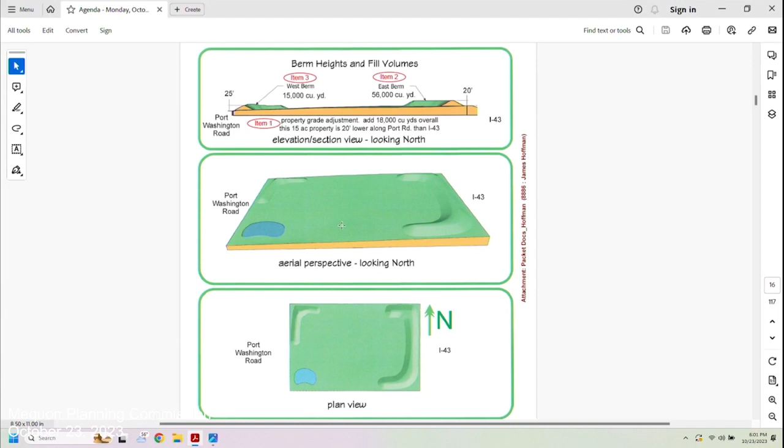I think staff is going to give us a quick overview about what this item is all about, if Cole's microphone will work. Not having good luck with that one. Okay, so Hoffman...

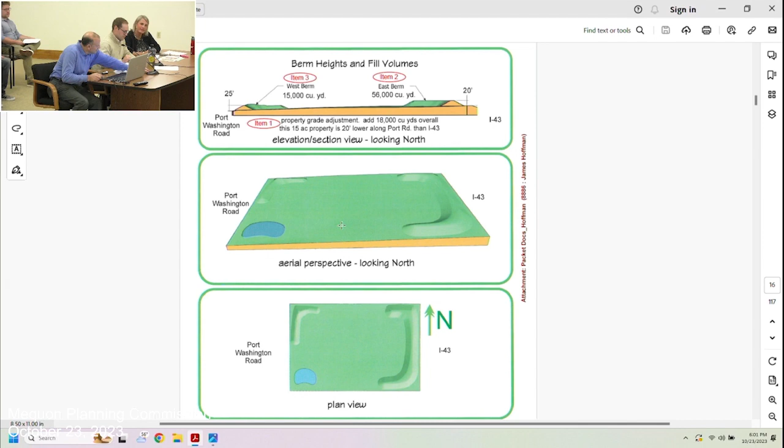Just for some context, I kind of broke this up into 3 items because there's kind of 3 different pieces to their application here. I have it up on the screen, although it's kind of hard to see. It's also part of page 16 of the packet. So the first item is 18,000 cubic yards of fill over basically the entirety of the site. I think the goal for the applicant was just to bring the site up a bit, so that'll be about a foot or 2 throughout the entire parcel.

Item 2 is the east berm. There's a 20-foot berm proposed on the right side of the screen, along the I-43 corridor. And then item 3, on the left side of the screen, is a 25-foot berm proposed along the Port Washington Road corridor.

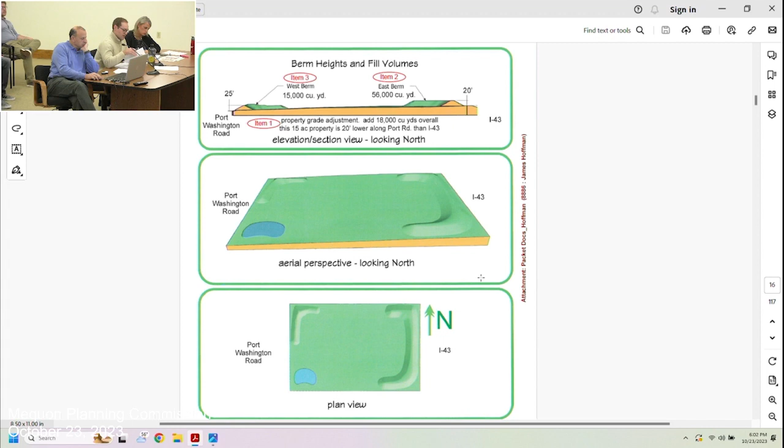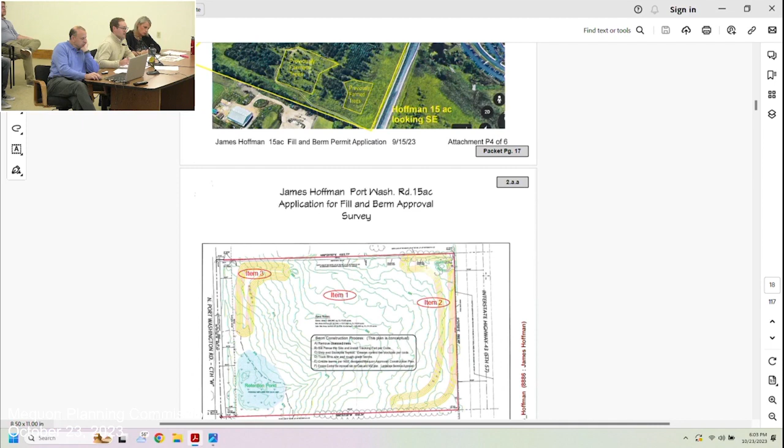Just for some context, the applicant submitted a reference to a state statute explaining that, in their view, local zoning ordinances aren't applicable to the fill and its placement for a state transportation project. We had to ask our city attorney about that. We unfortunately weren't able to provide a letter for you tonight like we wanted, but we are proceeding as if that state statute doesn't apply, and that is in the packet as well if you'd like to look at that.

So for item 1, raising the property grade of the site, that's just spreading fill throughout the entirety of the parcel. The only staff conditions we're proposing are the submittal of a grading plan for our review, so we can check adjacent drainage patterns and make sure we're not causing drainage issues. That's pretty typical with our fill permits. We also wanted to confirm the applicant was obtaining an NOI from the state, which is required for any disturbance over an acre.

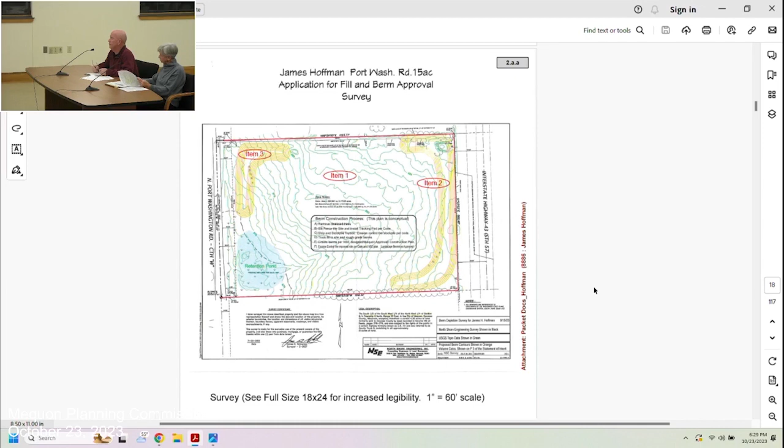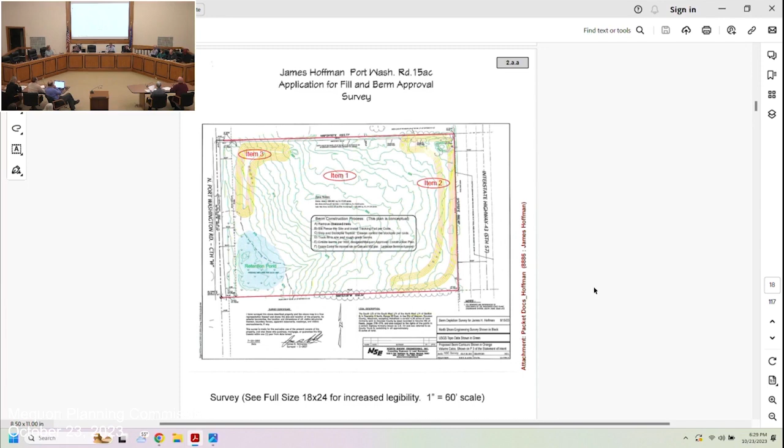So who made this slide? I'm getting confused now, 'cause did we not - we didn't make this, did we? I made that. Okay, and we wrote something on it? Yeah, the item numbers are just written on top of what the applicant submitted for this.

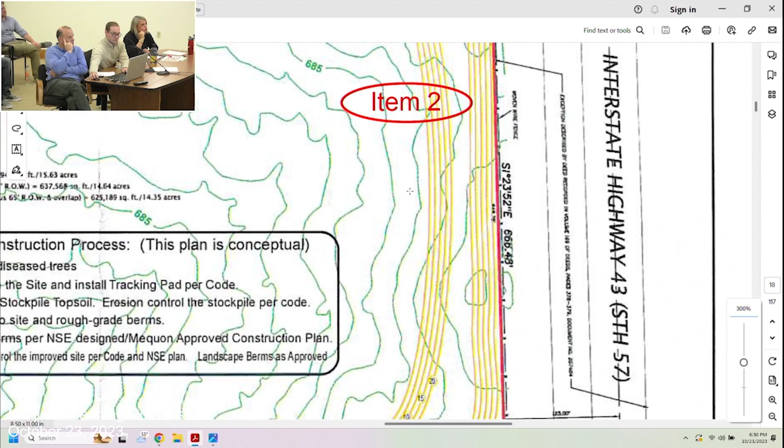Where other than our standard specs are we saying, dictating what the slope has to be? Just in the standard specs. Okay, yep. So I think - speaking for myself now just as an individual on the commission - for the berm against I-43, I don't much care because it's serving a useful function. It's certainly not the public-facing one in front. I think we're only talking about that one now. I don't think there was anything in items 2 or 3 that expressly described the slope other than our standard specs. Correct. Yep.

So if it was approved, per staff recommendations, they would be subject to that same slope as part of their final berm design. But I mean, we've approved - I think this body's approved steeper slopes on berms. We've approved them where there's unique mitigating circumstances, like a large freeway next to the property. Right, yeah. I don't think we intend to enforce the 4-to-1 there. I don't think that's implied. I think if it were stated as a 3-to-1, that would - I mean, I don't know if you need to get that specific. I don't think we do. It just has to be.

Well, we have to push your button too if you want to talk. No one can hear you except us. I like hearing you. Sorry.

A 3-to-1 slope, I'm not advocating as much as just for facts - it's something that is commonly used where steeper slopes are needed. 4-to-1 is your standard, just like you're saying. Steeper than 3-to-1 can be done, but then you're getting into more complex engineering that I think is outside of what you're doing. So I guess I'm just saying if it were 3-to-1 just for containing the berms instead, it might fit what people are talking about here.

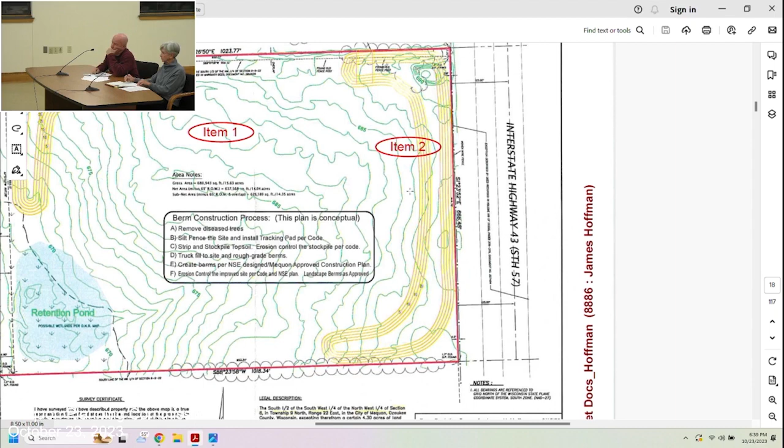So we have a motion and second on items 1 and 2 as amended. Any further comments or questions? All those in favor, please say aye. Aye. Any opposed? So items 1 and 2 pass.

Why don't we have a little more debate on item 3? I think staff singled this one out because the berms are abnormally high for the fronts of properties.

There's been some attempts in recent years to reduce the size and scale of berms, and I think there's a little bit of— you can probably describe it better than I, Jack. I think there's some sensitivity where we've tried to enforce other berms, and staff's very concerned about setting a precedent here.

Yeah, historically we've kind of gone back in a couple different ways with berms, but our code is based on some of the policies made in the mid-2000s where we didn't want anything over 4.5 feet or 6 feet at the max. We've kind of been trying to stick with that as much as possible.

There's been some minor deviations to that, but this thing is 25 feet. This is the size of some of our two-story buildings that we build along Port Road. I don't know if we'd even be in a position to ever approve it with a development plan, but absent a development plan, I don't even think we should entertain that at this point.

I don't think this would be a berm where we'd want to deviate anywhere from our standard specs in terms of design. I know it's Port Washington Road, but Concord Creek is a good example—they have berms along Mequon Road, probably the same traffic volume, maybe even higher in that area. Their berms are probably less than 6 feet high, well landscaped, and it's been 15, 20 years since those houses were built back there, and there's an absolute buffer between them and the road.

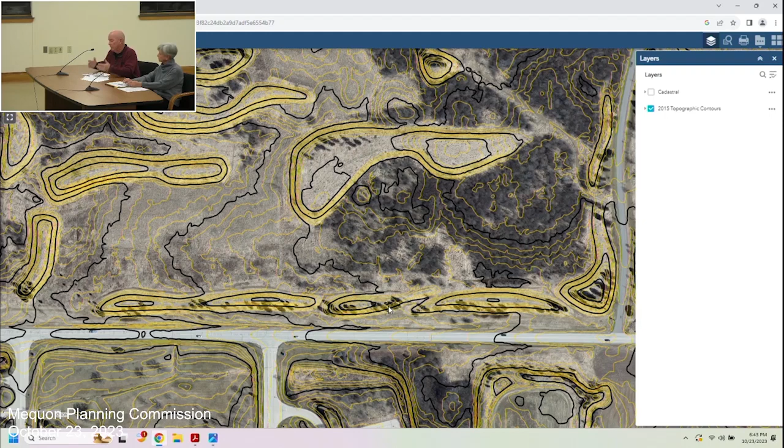I'm also sensitized to things that don't look attractive when it gets done, and I don't have a problem if we table this particular item tonight. I'd like the opportunity to come back with some good-looking designs, and maybe they don't end up 25 feet. But the 4.5, 5 feet option, that's really not a berm, and it doesn't get you anything in terms of blocking or screening noise or visual pollution. Port Road is also a negative with respect to this property. So we want this, when done, to be an asset to the community, but I'd like the opportunity to further discuss berms with the commission and find something everyone agrees is attractive.

Yeah, I think you're thinking about this in a very smart way. I like how you described it. I don't think any applicant is ever beholden to tell us exactly why they're doing a certain thing, but I always want to know, so I'm glad it was asked, and I appreciate that you were very forthcoming. It sounds like you're being very mindful about the best way to use this property, especially given some of the challenges you mentioned with the trees in recent years. I think what you're describing with River Hills, spot on — that makes sense, adjacent to 43.

So I think now where we're landing is, okay, I think we all just approved that approach for the similar, adjacent to 43 berm that you're asking for. I think it's going to be a struggle. Are you able to move forward with the DOT, with everything that you need to, based on the approvals that have already been given tonight?

I'm going to say I hope so. I tried to get the other gentleman here tonight, but he also has to take it back to his senior people, et cetera. So I believe so, I hope so. Because again, it benefits all of us to have this piece of land nicer looking than it would be otherwise, without some kind of undulation and without better landscaping.

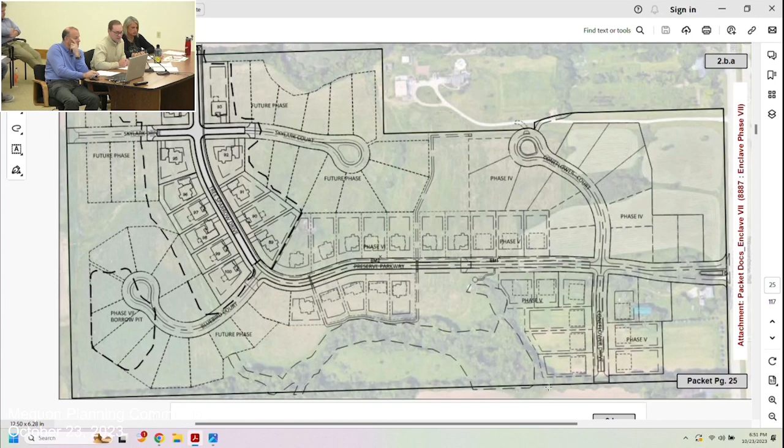I assume Cole's going to walk us through this one again. Yep, this is a DA application for approval as well as the fill. This phase, shown on page 25 of the packet, would be 12 lots between the older phases of Enclave and the 6th phase, connecting Preserve Parkway Street up into that past phase. Happy to answer any questions.

Are there any questions from the commission? We're all questioned out on fill permits. If there are no questions, are we sure? Going once, going twice? There's one.

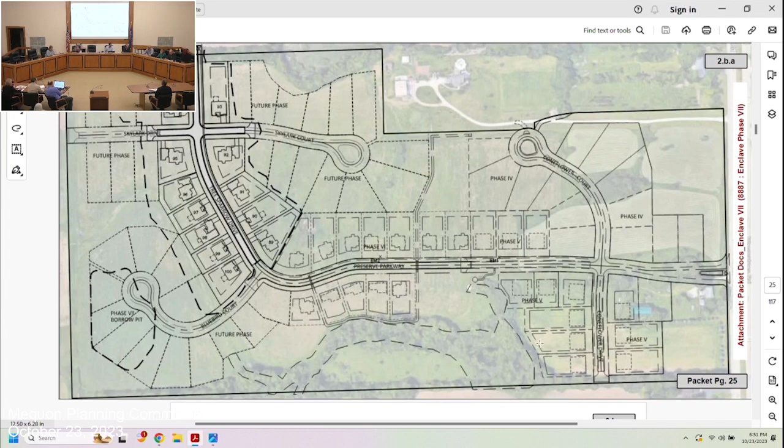Commissioner Barnes, would you like to make a motion? I'd like to move that we proceed with staff recommendations for approval of a staff agreement and the items contained here.

Any further comments or questions? This project's been really great—thanks again for building a quality neighborhood in our community. I second that motion. All those in favor, please say aye. Aye. Any opposed? That's approved.

Was this your fastest visit ever here? It is. You just got to get right behind—you only have to come 7 phases worth, and then everyone up here is softened up.

Fantastic, that moves us on to our next item: Dennis Bush for Kellaher. The applicant is seeking a certified survey map approval to allow for a two-lot division of the property located at 9832 North Range Line Road and the land immediately to the east.

So I have the CSM up on the screen for you. Yes, there's 2 lots. There's an existing home on lot 1 as shown right here. There's also 2 outbuildings shown on lot 2. Those will be razed as part of this approval process.

There's a small existing wetland located in this area that shouldn't have any impact on building a house on lot 2. In order to get to the 2 acres for this rear lot, the applicant purchased some land from the neighbor to the east, who has about an 8-acre parcel back there. So they purchased about 40 feet there. They also had to dedicate 50 feet to the city in the front for our ultimate road right-of-way.

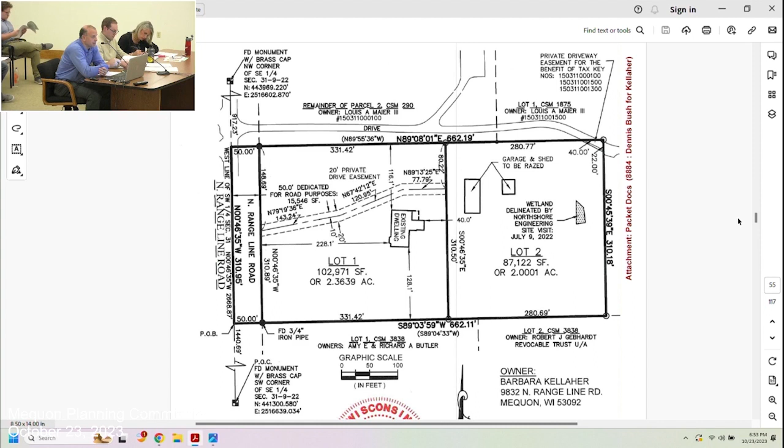Thank you. Any questions from the commissioners?

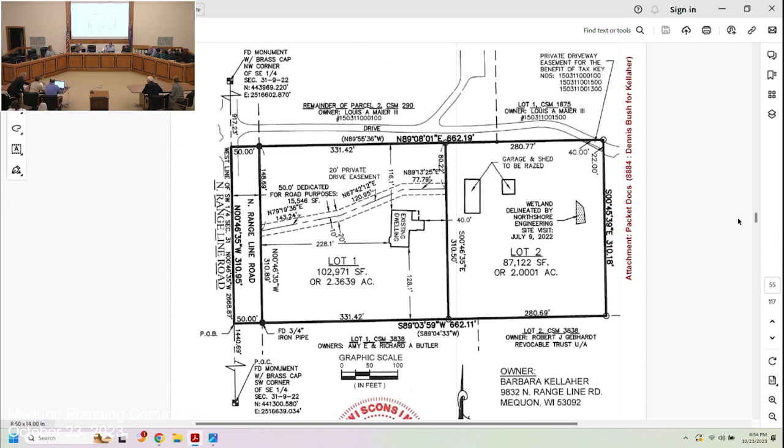Maybe we should jump into the letter, I think, then, if there's no questions. Want to walk through that? Do you have a copy of it available? I think I've got a hard copy here, but only a hard copy.

These were all engineering items, so I can start here. Nothing too major, just kind of responses to our staff report once we posted the packet. The first item, which I detailed in the report as well, is a driveway width issue with it being a private shared driveway. It technically has to be 18 feet in width per our specs. This is an existing driveway, and the applicant is requesting a waiver to that item. It also looks like there are some trees pretty close to that existing driveway, so staff wouldn't have an issue with that waiver, given Planning Commission's okay with it.

Item number 10 was relating to the utility easements. That was more of a comment that if the lateral was to be shared, they would need a maintenance and easement agreement with that shared lateral. It doesn't sound like they're doing that, so item number 10 doesn't need to be addressed. That's only there if that portion was being shared.

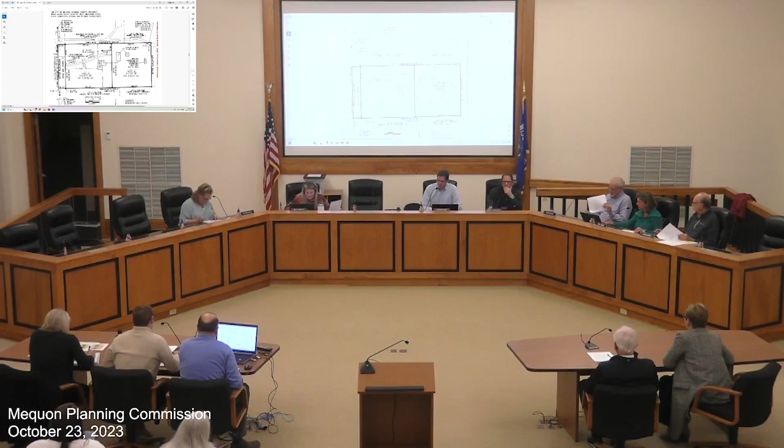Okay, so if I understand that correctly, there's really no impact to item 10 because they're not going to combine the lateral. Correct, so there's really no impact. Water looks like they qualify for a deferral at staff level. And item 13 is already addressed, so we're really just down to the driveway width waiver.

Why don't we - I think this is a pretty straightforward item with that exception. We want to talk about that. Does anyone have any concerns with that request? I don't have concerns, but you state that the standard's 18, but you never tell me what width it actually is that we're accepting. So we're winging it up here, and I don't like doing that.

The existing driveway looked like it was about maybe 14 feet or so. Yeah, I think that's right. Something like that, so it's pretty close. It's concrete, so it'd be a matter of pouring another slab of concrete along the edge for servicing one more property. That would be a little hard to do and make it look good.

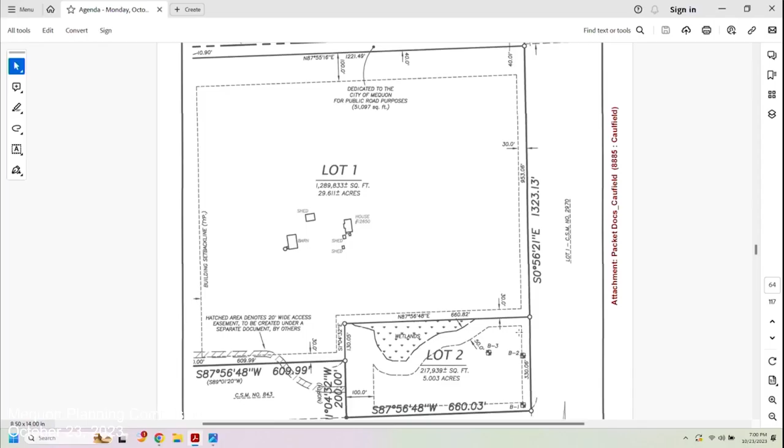Looks like Evan's got this one. So there's an applicant seeking a two-lot land division on Wasaukee Road. The current lot is 35.78 acres large, and they're breaking that up into lot 1, which is 29.611 acres, and lot 2, which is a little bit bigger than 5 acres. Lot 1 contains the only buildings on the property right now, just a dwelling and kind of farmstead buildings.

The city forester has been on site and determined no specimen trees are going to be impacted. Access to lot 2 is shown via shared access easement through a neighboring lot, which has the same owner as these two as well. Both lots meet the specific district standards for R1 zoning, but only lot 1 would keep its agricultural overlay since it's the only one that meets the 10-acre minimum for that. Yeah, that's all I had.

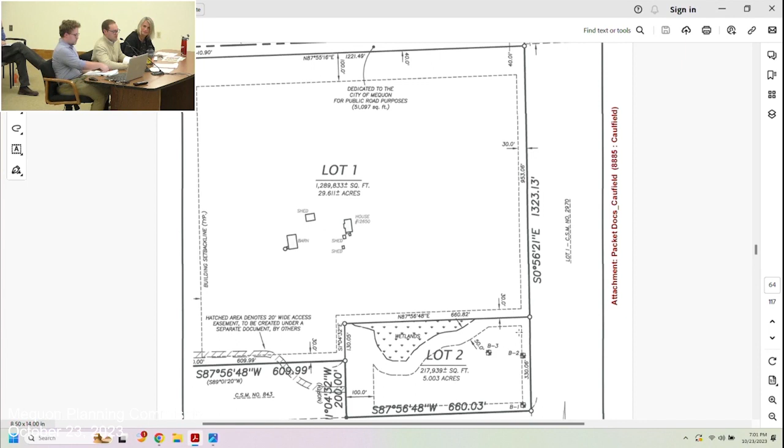And this one has a similar item with the driveway, suggesting the waiver as well. Staff again probably wouldn't have an issue with that given it's two lots. Like the mayor was saying, it's probably more applicable when we're serving 3 or 4 lots with the same access point. That's condition 11 on this one, right? Correct. Okay.

Any comments or questions from the commission? Commissioner Schaefer: Evan, can you show on there where the driveway is? I'm sorry if I'm just missing it. Right down through here. It's kind of blending in with the setbacks.

It's shared, it's not - it's 3 lots, like 1, 2, 3, like this little parcel down here as well. It would actually just serve lot 1 and lot 2. This is actually a Ozaukee County jurisdictional street right here. Got it, so they're requiring only 1 access for those 2 lots. So that's their requirement, basically.

So I don't see any other questions. Does everyone feel about the driveway width waiver? Do we have - there's no driveway there now? Correct, there's no driveway there now. Okay, so we'd have to decide what width we want.

What's the width of a standard driveway? Well, the plan there denotes a 20-foot wide access easement. So that's an easement, but that's not the drive. Yeah.

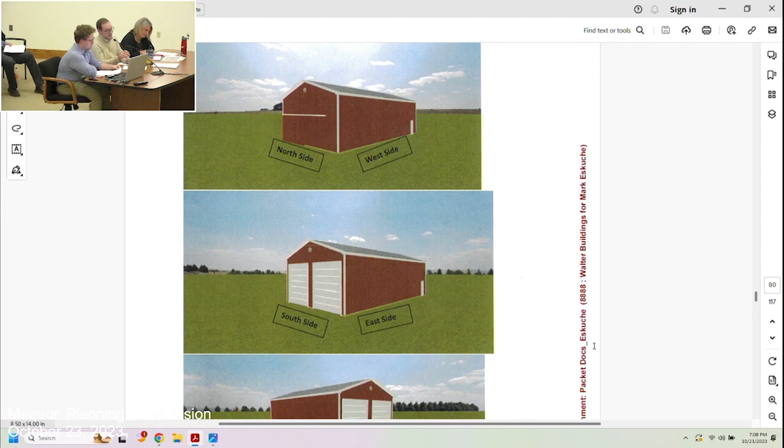Anything to add from engineering? Nothing to add on this one. All right, taking it back to the commission here. Any questions? I see one from Commissioner Schaefer.

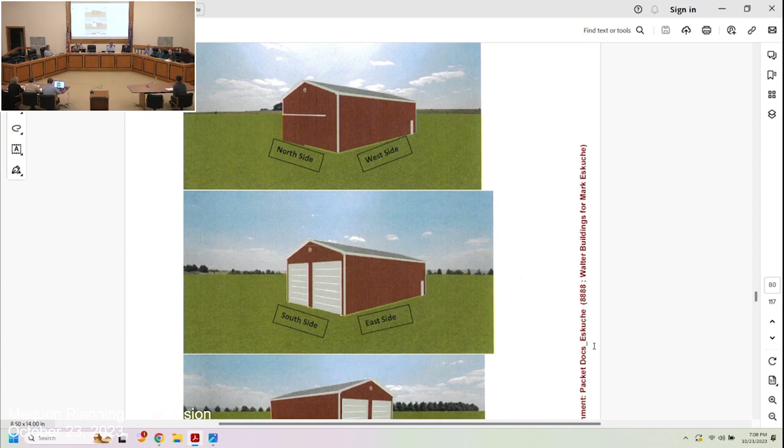It says both 30 by 65 by 15, and then it says 40 by 36 by 50, and then later it says 30 by 64. So which size is it? It's all relatively large, but maybe just to confirm, which numbers multiply together for the right square footage? 30 by 64 by 15.

Oh, then the existing. Is there a site plan that we can view? Yeah, right here on the screen up top.

So this is, I should use this. This is where the Quonset hut is, where it's collapsing, and where they would be putting that storage building. What are the other buildings? There's a Quonset hut here, another one here, a barn here, a dwelling here, and kind of a machine shed warehouse right there.

I don't know if that's all the same business, though. I think it is.

Well, we should do a site visit, I think. I think we have to test out. Maybe, Commissioner Barnes, we should test the wares. Yeah, thanks.

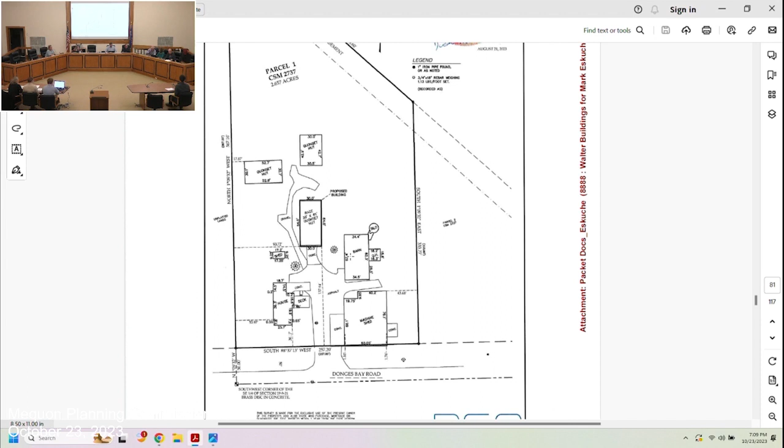As a resident near that area, I think it's good that we have a business like yours in the area, so I encourage you to move ahead accordingly. I will say, I don't hold objections to the recommendations for staff approval here, but I do have one significant item.

I don't know if you saw me today, but I went to look at the site. I go by there all the time, and frankly, one of the things I mentioned to some other people, and indeed there is a concern about the presence of the truck and the visibility. It's for the uses in that area, but when it is parked and in use like you had it today, it is impeding in the city right of way.

I understand for the way you have it operate for loading of the vehicles into the truck itself, but your ramping and so forth actually goes outside into the city right of way. Not that we have a whole lot of traffic, but when there is commuter traffic morning and afternoon from the executive park, there's a surprising amount of vehicles through that area.

So I have a two-part kind of concern or wonderment, maybe you can address for us. One, with the conditions put in here about getting the RVs parked out of the way, and the tractor trailer not being parked except when you're loading and unloading, where would you be putting it other times? That's the first part of my question.

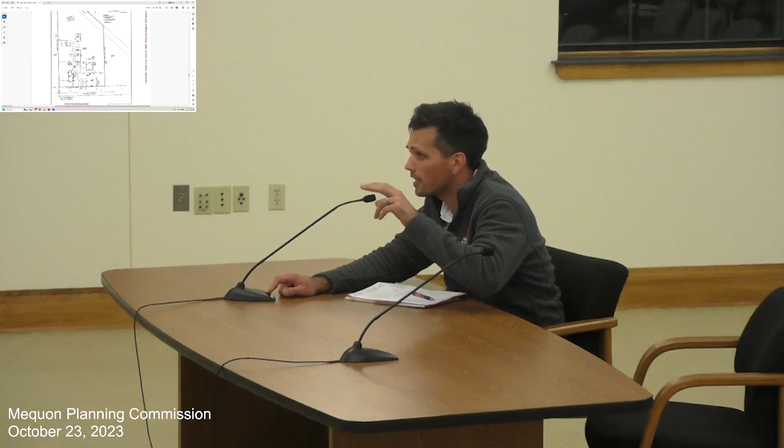I'm actually the contractor, so I'm not 100% sure where he's going to put everything. But if you see the two other Quonset huts on there, this is one of three, so they're all falling apart. He's going to take the other two down as well and put buildings on them. We're going to get approval for each, but he's going to eventually store them in there. So those will be separate items coming forward.

I guess, so where I'm coming from right now is the immediate concern of the truck on that drawing today. The back of the truck was sticking out past the right-of-way line, and essentially the ramp itself was right on the edge of our city street pavement. I know that's what you have to do to physically move it in, and in the middle of the day it's probably not an issue, but if you're doing it in the morning or the afternoon, I think it's a significant problem.

So I'm just raising the question, without trying to change everything on you, should the proposed barn be pushed further in, in the context of what you've got, or is there an alternate position for the truck for where it's going to appear on a weekend versus where it's going to be during a weekday with traffic?

One thing I'd say is that he is gone for 6 months out of the year, so it won't be there for a good chunk of it. He actually travels and delivers the Porsches to different races throughout the country, so it's not there all the time. He could put it back further in the property as well. If you can see onto the side of that Quonset hut, it wouldn't be an issue. It's just his machine shed, where he unloads his Porsches and works on them, just off the side of Donges Bay Road.

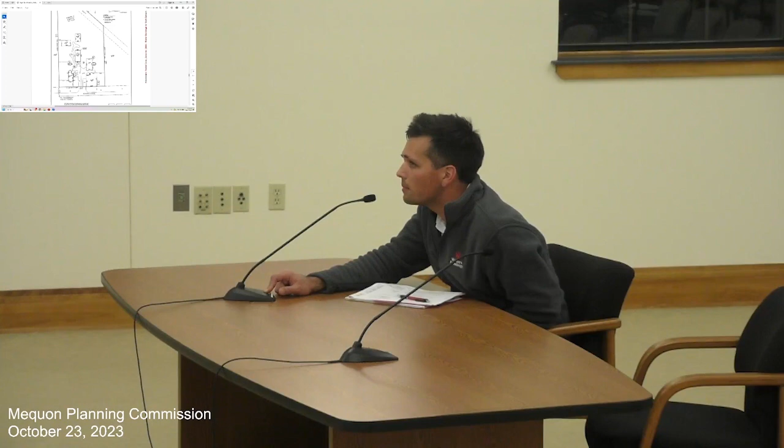I understand, but I'm coming from a public safety consideration of a vehicle fixed in or outside your property in the public right of way, right next to traveling vehicles on Donges Bay Road. Another option for us would be to send code enforcement out there as well to resolve that issue rather than dealing with it here.

I'd prefer to find an alternate spot on site they could park it normally, and identify that when loading and unloading cars, if it needs to move somewhere temporarily, fine, just don't keep it there. I would like to see something like number 3 under staff recommendations say the tractor trailer may be stored towards the rear of the property or behind the house when not actively in use, loading or unloading.

I also tend to think he could keep his RV on the property. This is an industrial area, and cars may be parked outside - that's the nature of the business, and this is kind of the place in town where this could happen. But with the stipulation that it's maybe to the north of the house or something like that, where it's less visible from the street.

I mean, it sounds like the business is going well. You're building a new building. That's great. I think, let's have more Porsches in town.

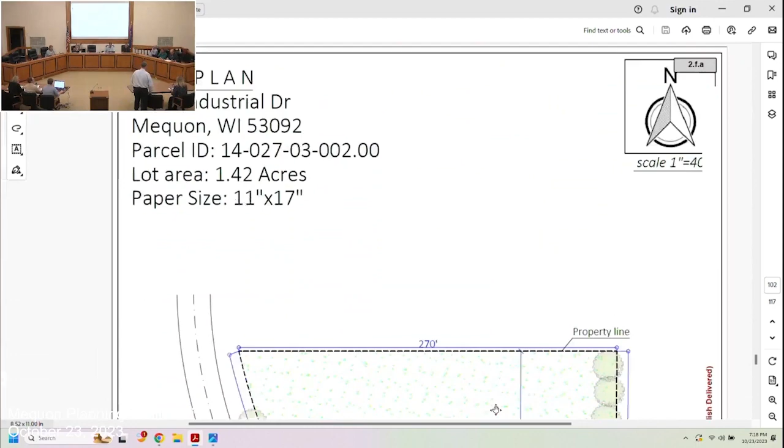Next, we have Kathy Burghardt for Delish Delivered. The applicant is seeking building and site plan approval to allow for a 2,300 square foot catering services facility for the property located at 6340 West Industrial Drive. And Evan's going to give us a quick overview on this one as well.

So the applicant is seeking building and site plan approval for the property at 6340 West Industrial for a catering service / food delivery business. This is triggered by the town center district requiring all changing sites to require building and site plan approval if not completed in the last 5 years. The use of catering service is permitted in town center already. The business operates as a food delivery service for pre-made dinners. Half of the staff is there to cook the food in the morning, and the delivery team loads and transports the meals later in the afternoon.

Because the site predates town center, the district creation, by quite a bit, there are some disparities with the code. The building is set back more than 50 feet when only 10 is allowed in town center. The building is not offset enough from the east—it's 7 feet right now, shown as 11 feet on record, but when measured it was about 7 feet, and it should be at least 10.

The building doesn't have enough parking spaces per code with both this business going in and an existing individual office tenant who resides there. That would require about 35 stalls, and it has about 9.

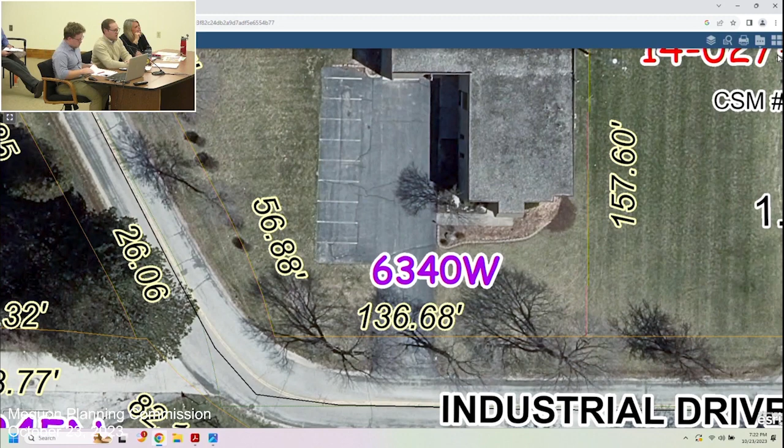You can't really see the orange on here, but basically at that corner, the street doesn't really follow the center of the right-of-way, due to the geometry of the parcels on the north side. There were quite a few improvements to the north on Buntrock—a widened section with paved shoulders, some areas of sidewalk adjacent to the new townhomes that went in, as well as Artesa. Matching that section throughout here, which is the eventual plan, would be very challenging with the right-of-way as it stands now, and then if we went to the property line here.

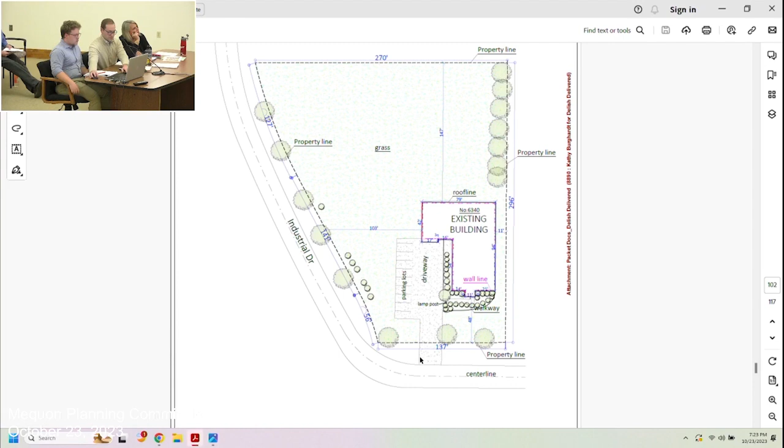So this area—basically what we would require is a right-of-way dedication 60 feet from this property line on the other side of the street that's not on the screen, but it'd be this triangle here that we would require right-of-way, both for future street improvements and potentially sidewalk and streetscaping. So that was the one condition that engineering added.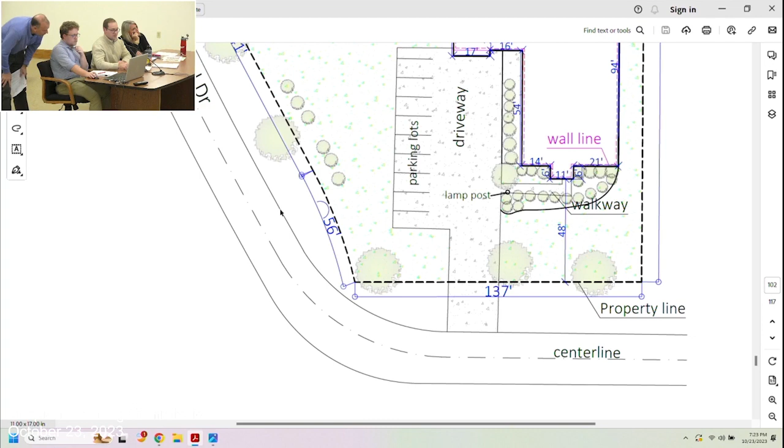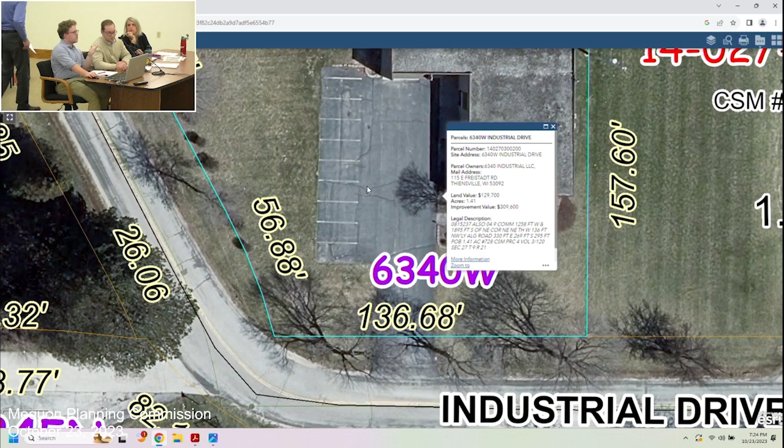Triangle, the dotted line is what you're recommending? I think there's another one over the top of it—that's the existing one. I unfortunately can't really show you with the GIS, but it'd be approximately here, it would match the geometry on the other side, it just doesn't show up very well. You can kind of see it in the GIS—there's an orange line across the street that goes across that white concrete driveway, right on the corner there. Right here, so it'd be 60 feet from there would be the line that we would require.

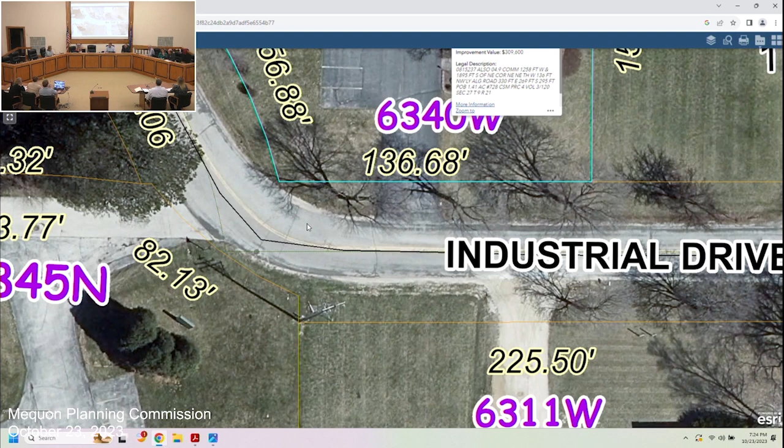Okay, that's it for the staff report. We'll take some questions now, and then we'll get to the applicant in a second here.

Commissioner Barnes: following up on what you were just talking about, I don't really have much in the way of objections on what's being proposed by staff, but I noticed the trees along the right-of-way line, and that's where I was getting concerned about the alignment of the road. My hope would be that the trees be preserved—I see they would be going into the right-of-way, though currently on private property. I realize this is some other work, but in terms of matching it with what's required here, and how that relates to the requirements about adding some planting, some shrubbery—can that be made to fit if the street alignment was adjusted a bit like you're talking about?

Potentially, we have not even started looking at this for improvements. It could be 5 or more years down the line, but eventually the goal is to match that section from the north down and match it into industrial to the east, because with the school right there too, providing either a sidewalk or at least a paved shoulder would be really beneficial. So that was kind of the goal of that, but we would try to preserve trees if possible.

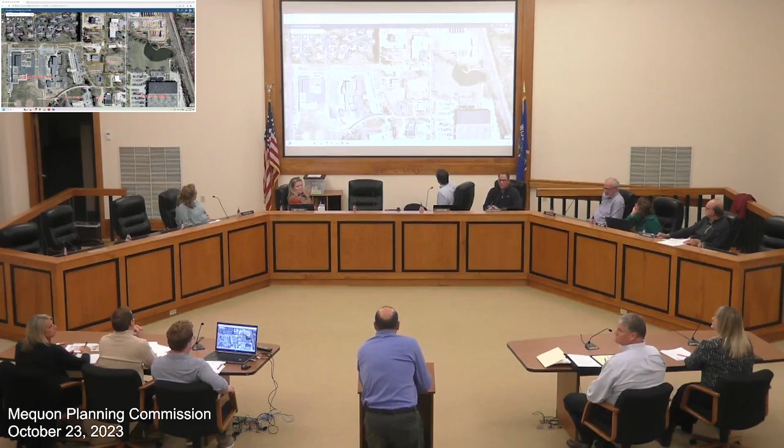So our intent would be eventually to have the lighting throughout this area here. Now some of these are vacant, some have been purchased by other developers, so eventually maybe some of those will fill in. But if we do not require anything in here, we're going to have a gap, and that could sit there for 10, 20 years. So we're just trying to walk that fine line between not overly burdening the applicant, but trying to get as much of the town center standards in place as possible. So if time is an issue, we can always look at extending the time frame to get those amenities in, but we really would like to see at least some of those amenities put in as part of this change of use.

And then the right-of-way question? That's an engineering issue, I think, kind of along the same lines. Like I was saying with that corner, we're going to have great difficulty doing anything like we have elsewhere in town center with our street section, streetscaping, or lighting around that corner. This seemed like a prudent time to try to fix that, but if it's not...

We don't have to require it, but it's one of those times that something's actually occurring here, so it comes up frequently. It's almost like correcting a mistake that was made in the map 50 years ago when the road was first put in. The right-of-way center line doesn't go where the road was actually built. I'm sure it was easier to draw on a map 50 years ago, but it's not very functional today. I think that's what's up with that item.

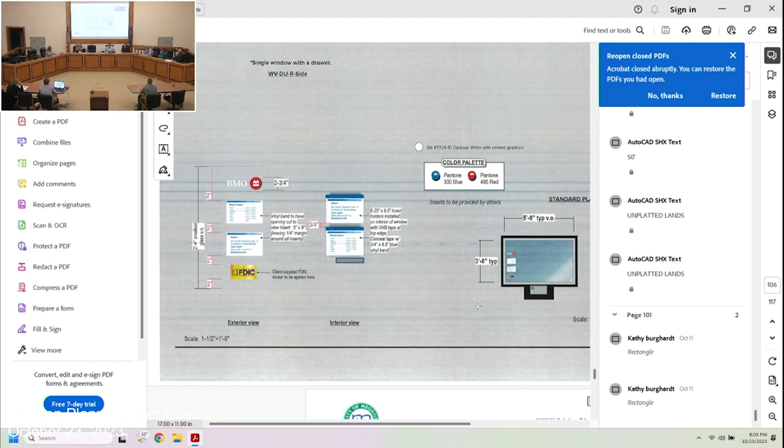Yeah, it's this BMO logo, and then this hours statement, this updates. It's at least packet page 100 in my packet, might be a few off for others who downloaded the packet early—either 106 or 101 in the revised packet. It's got the BMO logo, the hours, the FDIC sticker, and notices like Thanksgiving hours, Christmas hours, holiday hours.

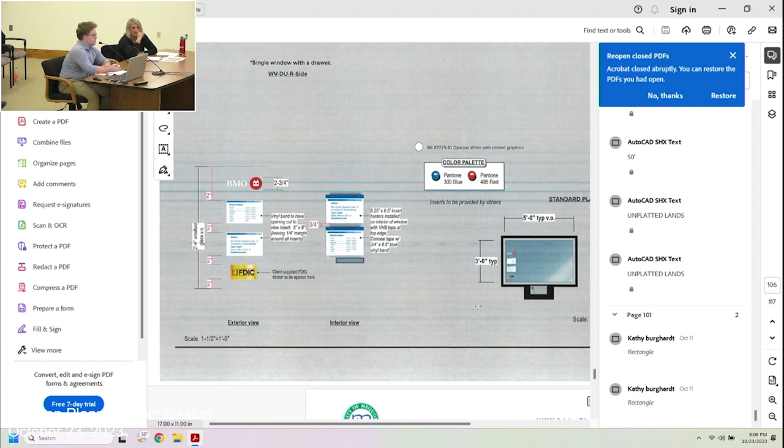Number one, I'm dumbfounded why we're looking at signage at a drive-through on the side of a building underneath a canopy, not facing the street, and the fact that I don't think anybody in any of the lanes probably pays any attention to that anyway.

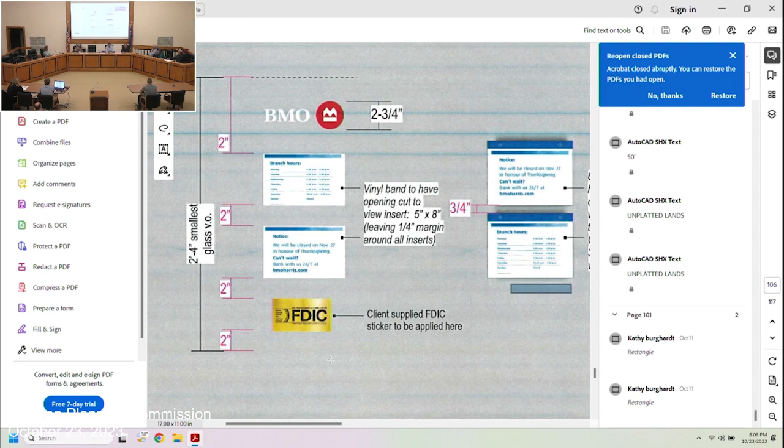It feels like we're caught in a catch-22 here. In order for it to be small enough in square footage, it's inherently going to be illegible for many of the lanes. I'm not exactly sure what this is hurting. I agree no one will be able to read it, but I'm not sure it's hurting anything either. The people that want to read it will pull up, find it's closed, back up, pull into the first lane to find out the hours. That's what I have done.

Move to approve. Second. There's a motion and a second. Any further discussion?

Commissioner Schaefer: I just wanted to get staff's thoughts because it doesn't meet our code, but also— Staff: Yeah, we just thought it was like— Do you feel like it's egregious? Let me pull up what's existing. I don't know, you'll see—it's not really... it's small, I don't know. The BMO logo is 2 3/4 inches tall.

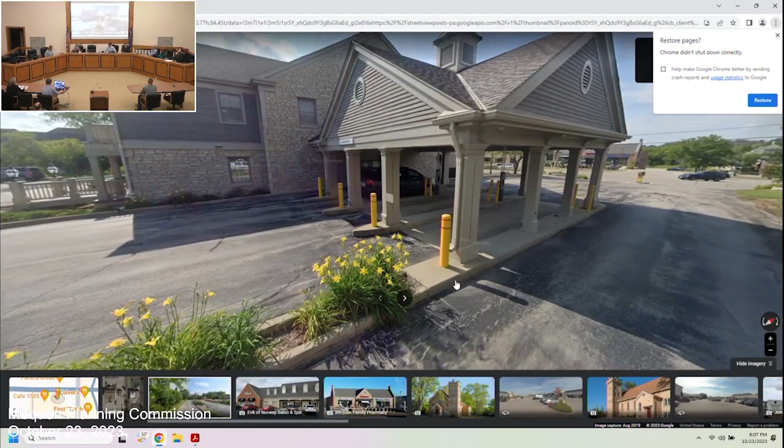Well, I'm just thinking about the denial versus voting to approve when staff notes say denial. That's really not the best image. I don't know if you can barely make out—oh yeah, if I put my cursor over it, you can kind of make out where the existing vinyl signage is. That's just a much larger version of the same thing and same information. It can be read across all 3 lanes fairly easily. That's what's existing, and it's non-conforming at this point because it's more than the 2 square foot maximum.

Correct. So staff wants it larger, right? Yeah, to keep the existing. Yeah.

So the existing cut vinyl lettering with hours on it, correct? Correct, not these little insert cards? Correct. Quite frankly, once they're on the other side of tinted glass with any type of glare, you're simply not going to be able to read it. I worked in graphics for 20 years, this isn't going to work.

I'm supportive of staff's position on this, just for the record, team. I'm not worried about the size. In my opinion, the logo could even be a little bit bigger. I don't know that you need your logo on every window. I think people know based on the sign outside which building they're pulling up to. But I'm supportive of staff's position and will vote accordingly tonight. I agree with Commissioner Choren's statement that this is so small it really just doesn't matter, honestly.

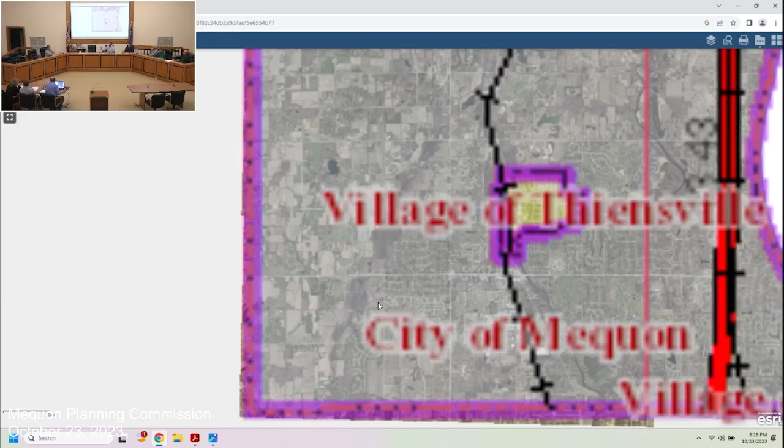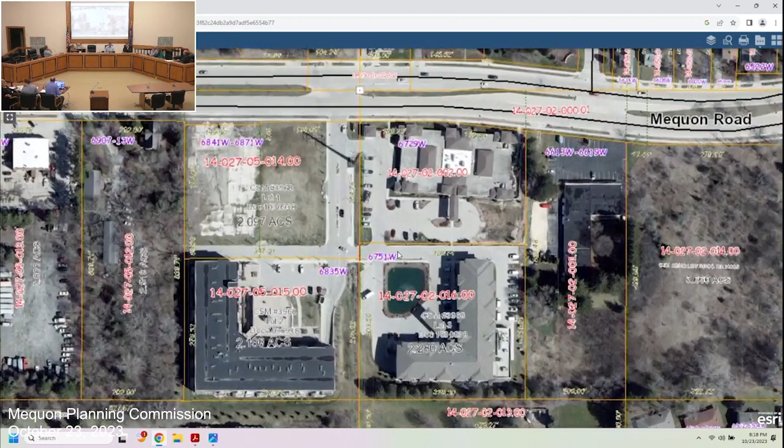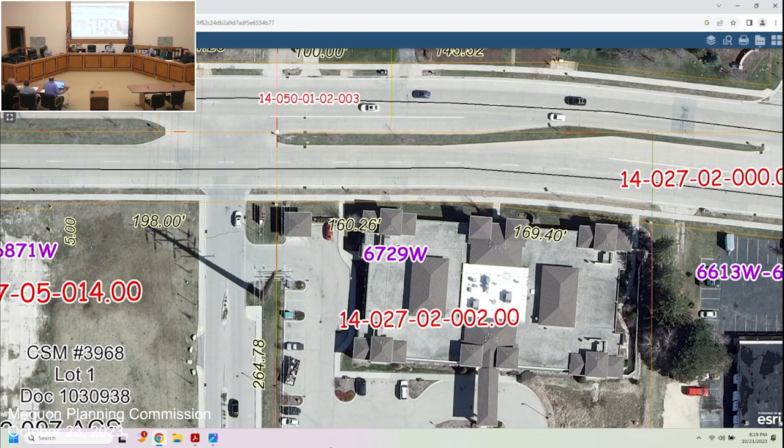So here I got the view. So this is the entranceway. The current sign is located about here. So if you're traveling eastbound, you'll pass the sign, and you're going to have to turn around and come back and go around. The proposed sign is basically at this location, which will still have the same impact unless you're able to see it past the reserve sign and the transformers.

I actually sort of like Jack's suggestion to build it off that wall and have it come out. If you're willing to entertain that, we could talk about a little bit of a setback waiver to have it come out if you're willing to relocate it. I don't know, it seems like a lot very quickly. And even coming from the other direction, you could totally block the reserve sign if you're traveling westbound.

We did actually ask them, and I know it was a long shot, but we asked them to reach out to the reserve to see if they could be party to that sign, and of course they didn't want any part of that. But they did try to reach out, and just for context, the reserve was actually supposed to be the original name of the whole development, and that's why it's located there, and then the apartments basically took on that same name. So it's somewhat unfortunate, but that's the situation we're in. And they did put up a sign. They were the first ones in. This building was the first one in this area for those buildings, and they did put their sign in there originally. So I'm not sure what the change of heart was.

I think it was new ownership that came in. I did offer that suggestion. They didn't really want to take it, but that may be a different option now that they know their request would be denied. They may have second thoughts on that. I'm not sure where the applicant is. He was aware of the meeting, so I'm not sure what happened.

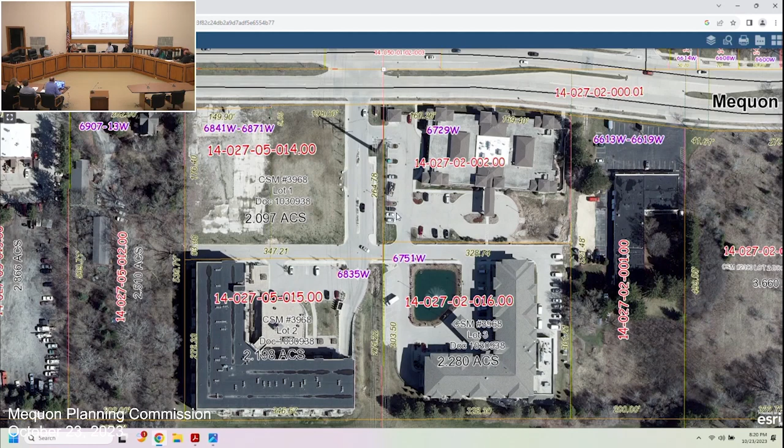Hey Jack, what's the height of the reserve sign, and is there an opportunity to combine the two? There's really not an opportunity to combine the two because the other issue is, if you zoom in closely, you'll see the property line runs right through basically that edge. So it's hard to make out here, but the reserve sign is here, so that's located on this other property. And that's actually not even owned by the reserve. That's owned by Lakeside Development, who actually owns this full vacant parcel in the front, which eventually will probably want a sign for whatever happens in that location. So they would need not only Lakeside's approval, they would also need the reserve's approval.

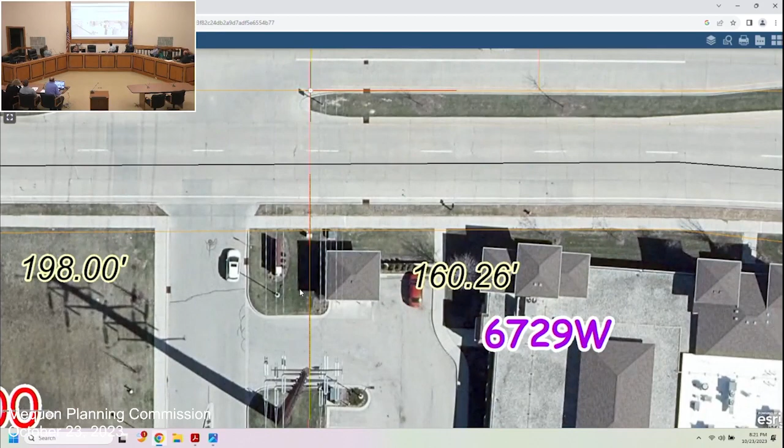The height of the reserve sign is fine. That meets our 6-foot height requirement, but the reserve sign itself is at, I believe, 50 square feet, so you couldn't make it any bigger because that's the limit. The story point sign is actually smaller than the code allows, but it's taller. It's taller by a foot.

Would it ever be acceptable, or would they ever entertain putting it on the building facing west? That was the other suggestion we had, was to kind of fill that gap with the wall and put it there. Let me get to that picture again. Just put it on this wall itself and have a sign here, but then they feel like driving down the street you won't see it until you're right on it. So they want it perpendicular, which makes some sense. So that's why we felt kind of integrating it off this corner somehow, incorporating it with that wall.

Years ago we asked them for some landscaping up here. Obviously that didn't take very well, so there's nothing here now. So I think this whole thing could be spruced up a little bit with a sign and some nice landscaping in front of the sign, in front of the wall.

Could it be actually on the building face? You're allowed a wall sign, yes. That's a tough building—other than there, there's not a lot of good spots on the rest of the building to put one. Yeah, they could put it on the siding right above the reserve sign. I was just going to say, what if they put it on the west side of that small building? Gosh, that would... Yeah, they haven't requested any building signage. I think, again, they feel they need to have that view from the road so that when you're driving you see it clear, and I think anything parallel they think is not going to work.